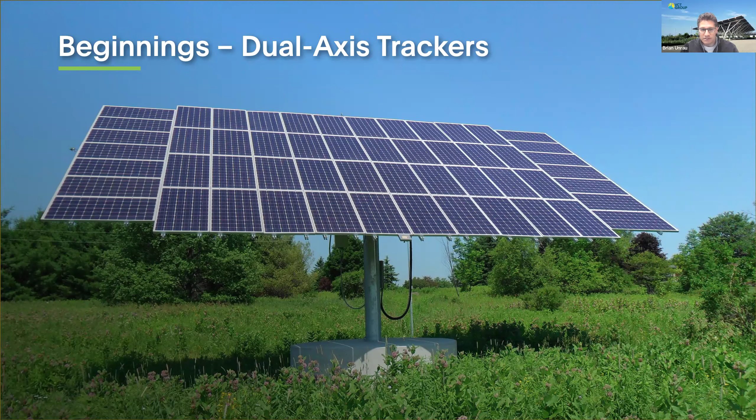So starting with our story here, when we first got into solar back in 2009, carports weren't even on our radar. We started with dual axis trackers, which are ground mounted machines with motors and gears that tilt and rotate to follow the sun across the sky. From morning to night, they chased every ray of light. We installed hundreds of them, and at the time they made a lot of sense. We liked them for their intelligence, squeezing more energy out of each panel. We thought, this is solar done smart.

However, fast forward to 2017, and we got the opportunity to work on the Evolve 1 project in Waterloo. This was Canada's first certified zero carbon building from the Canada Green Building Council. Now, even then, we were still tracker people, so naturally we tried to convince the property owner to install a field of trackers in the parking lot. He shook his head and said, no, carports. We begrudgingly agreed, and I'm grateful we were nudged, because during that project, I think I fell in love with carports.

So before we dove headlong into the carport design, we validated the opportunity. Parking lots are one of the last great underutilized canvases in our cities. In Canada alone, we have about 80 million parking spots, and a full quarter of those, roughly 120,000 acres worth of asphalt, or 20 million spots, are in the institutional, commercial, and industrial sector, which is bigger than some provinces.

And here's the kicker: per capita vehicle ownership is still climbing. Households with 3 or more cars are growing fastest. So we see parking lots as a necessary evil, but something that is going to persist into the future. They aren't going away. In fact, they're growing, which means we have to ask, will they remain heat islands of asphalt, or can they become power plants and public assets?

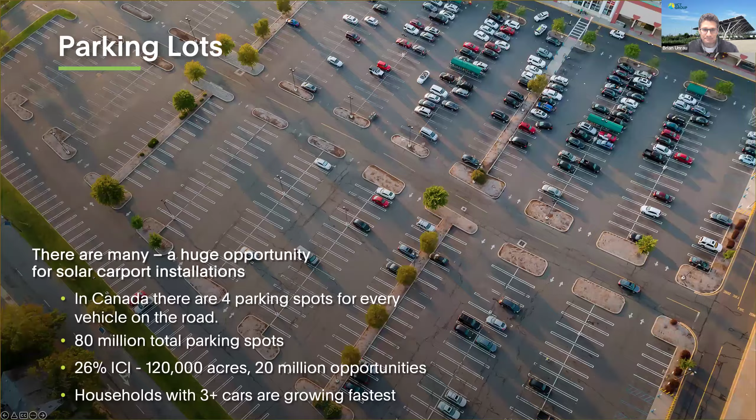So everyone I've ever taken for a stroll under a carport has had a similar reaction. Basically, they stand underneath, look up, and say, we need to do this everywhere. And I'm hoping you all start to feel the same. We think it just makes sense. It's solar you can actually stand under. It's not invisible on a rooftop, but part of our daily life. It's shade, it's shelter, it's identity, along with clean energy.

And here's the real architectural shift. Rooftop solar really just asks the technical question, how many modules can we squeeze in? Carports ask a very different one: how can structure and energy elevate the space? And that's where solar stops being equipment and becomes architecture, we believe.

The first carport we built was supplied by a company called Schletter. Halfway through, they filed for bankruptcy protection and everything froze. Some of their former staff, even unpaid at the time, helped us work directly with the aluminum extruders, and with their blessing, we managed to finish the project on time and on budget. The only thing we lost were a few sleepless nights. Unfortunately, when Schletter came back out of bankruptcy, they stopped selling carports altogether.

So there we were. We just built our first carport. We were getting compliments left and right. We saw the opportunity in front of us, and suddenly there was no product to buy. And that's when we made the decision: if we want to keep building these, we'll have to design our own. So what began as a reluctant yes became a design commitment and something that we've now been working on for about 8 years.

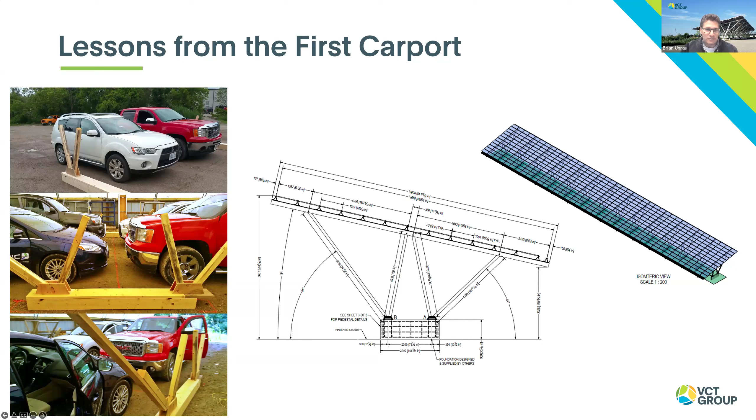And then came installation. The original design used clamps that pulled from the top, which meant our crews were tempted to climb out of the lifts to reach them. Not exactly safe. We'll just have to say that our safety officer was kept busy during that installation.

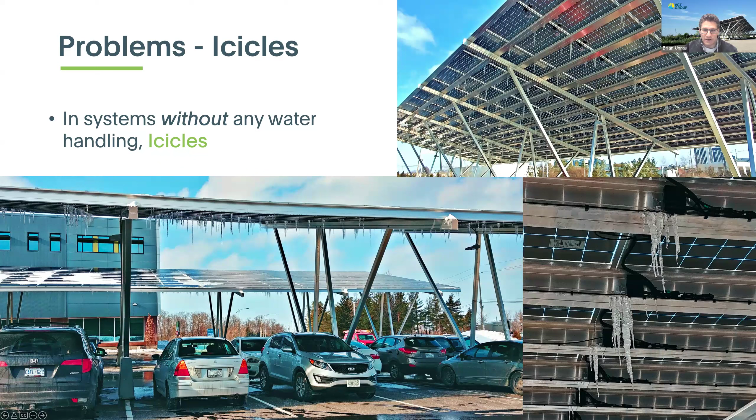And then the first winter hit. Suddenly, we had 3-foot icicles dangling throughout the entire array. One person described to us that he was ending up scraping 3 inches of ice off his windshield before he could drive away. And so that really wasn't the user experience that we were hoping for as we built these systems in the parking lot.

Snow would drop right at the edge of the stalls, and it was close enough that plows couldn't clear it properly and cars couldn't get out of their parking spots. It was a humbling reminder: getting the design right isn't just about structural integrity or panel yield, it's about how people actually use this space, and that really informed how we looked at things going forward.

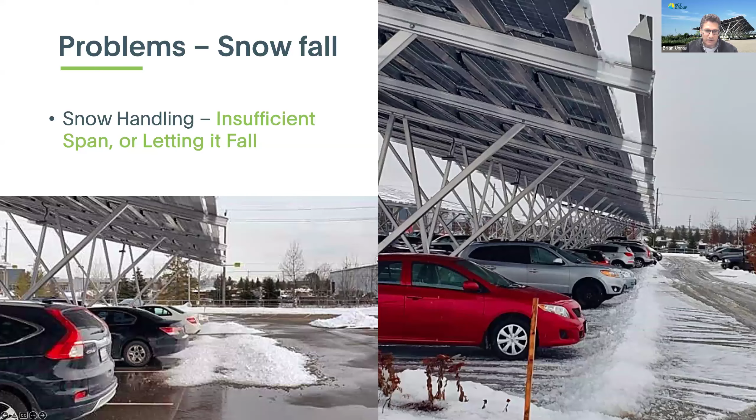Carports are exposed, they can't hide, they demand architectural consideration: there's the rhythm, the proportion, and its physical presence. And at the same time, snow loads, drainage, budgets, maintenance, it's a balance of beauty and pragmatism, and that's what makes them a fascinating design challenge.

So out of those early lessons, the door clearance issues, the safety headaches, the snow and ice disasters, we started to shape our own design priorities. And if you embark on your own design of your own carport or canopy structures, or are simply looking to the industry to see what features of a carport are important, we recommend consideration of the following.

Firstly, no vehicle obstruction. It seems obvious, but parking stalls only work if people can actually open their doors and get out safely. Second, using industry standard panels, but build in flexibility. So module sizes right now are a moving target in the industry. They're getting larger every year. So we feel that a good carport needs to adapt as panels evolve without forcing a redesign every few years.

And as a specialized product, there are what we call frameless modules available in the market that are more similar to an insulated glazing unit. We looked at these for the basis of designs, but realized that it didn't make sense for us to pay a premium. Sometimes those cost up to 5 to 10 times the cost of a regular panel. And then the first thing we want to do is put a metal frame around it. So we went back to the industry standard panel and decided that that's got to be our basis.

Third, we wanted to optimize for bifacial panels. So there's free energy bouncing off the pavement that can hit the backside of the panels, and we want to capture it. So depending on the site and the elevation of the plane of panels, we can produce an additional 10 to 15% more energy using bifacial panels, and these panels are more or less the same cost as a single-sided panel.

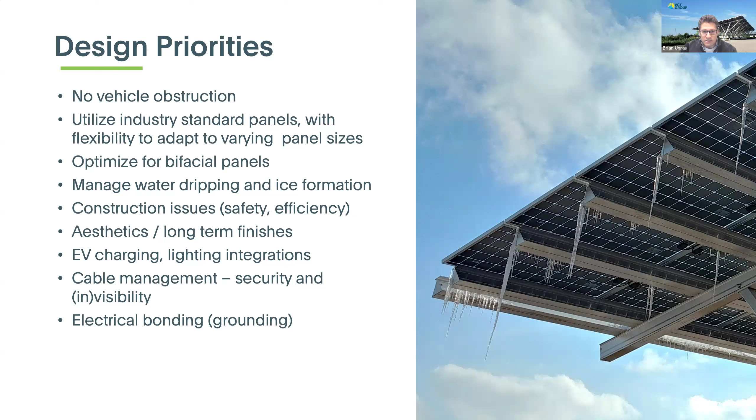So taken together, these became the core of our design checklist, our way of turning those early growing pains into a system that was not just functional, but durable, safe, and we hope worthy of being called architecture. So a little bit about some of those individually.

So one of the biggest advances in solar technology over the past few years is the rise of bifacial panels. Unlike traditional modules, bifacial panels collect sunlight not just from the front, but also the backside, capturing reflected light from the ground or snow or surrounding surfaces. And in the right conditions they can add 5, 10, or even 15% more energy production. But there's a catch: it only works if the back of the panel is actually exposed. If a beam or conduit shades the backside, you've essentially paid for a window and covered it with plywood.

So good carport design means keeping the backside clear and uncluttered. Structural members need to frame the panels and not eclipse them. And of course, cable management and electrical bonding need to be tidy and not draped around. Done right, we think bifacial optimization is about turning every square meter of the canopy into a working surface, top and bottom. It's a detail that looks small, but we think it can add years of extra energy yield over the life of the project and really improve the economics.

Another thing that we see out in the industry is that not every so-called solar carport we believe is really a solar carport. Too often what we see is just generic frames with a deck on top and then solar's really just bolted to that. Really, they just created a roof and they've done rooftop solar out in that parking lot. The panels are incidental and sometimes they're even invisible.

So we think carports are the opportunity to make solar authentic to the design. The panels aren't really an accessory, they're the roof plane of the system. The structure, the spans, the rhythm of light, all of it shaped together with solar in mind. So it's really taking it from a carport of solar, not merely a carport with solar. And that's when they stop being shelters and become symbols of value. They're really statements of climate leadership. As one person put it, it is often the first and last impression you have of a facility when you arrive or depart. And we think it leads to better architecture.

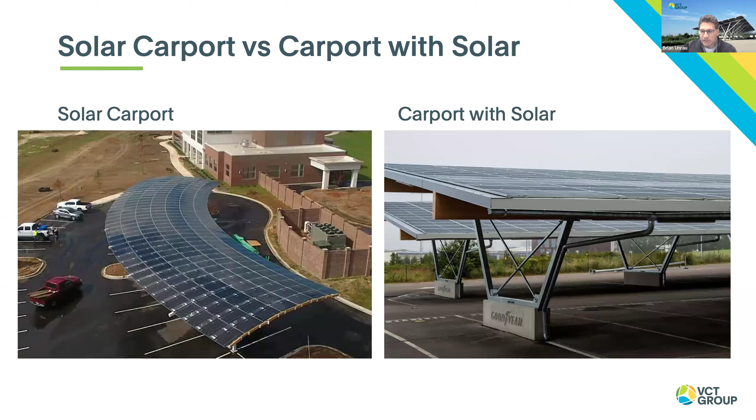Textbooks will tell you the optimal slope is about the latitude that you're located at minus about 10 or 15 degrees. So here we are in Waterloo region at the 43rd parallel. So that would put optimal tilt at about 30 degrees. But a 30-degree carport is kind of impractical. It's kind of bulky, awkward, and it almost looks like we put a ski jump in the parking lot. So we compromise. Most carports we build and what others build in the industry are somewhere around a 10-degree slope. And of course, you want to try and have that due south wherever you can.

Taking it down to 10 degrees from 30 degrees in our area here is a bit of a sacrifice, but it's only about 5% of the energy generation by taking it down those 20 degrees. And if we take it off of due south and start turning it either east or west at a 45-degree angle off of due south, you want about a 5 to 10 degree slope on things, and we're only losing about 2% more power. So it isn't so critical that everything has to be exactly true south when you're looking at orienting things in a parking lot.

And then if you even get so far as facing due east or due west, then actually 3 to 5 degrees is optimal, and you're losing another 4 or 5% production. But sometimes it's just necessary to work with the drive aisles. And then the good news is that the bifacial gains that I was mentioning can help claw back most of what you lose from not chasing textbook perfection. So the sweet spot is really just balancing that energy yield, the structure, the aesthetics, and how you're going to work with the snow.

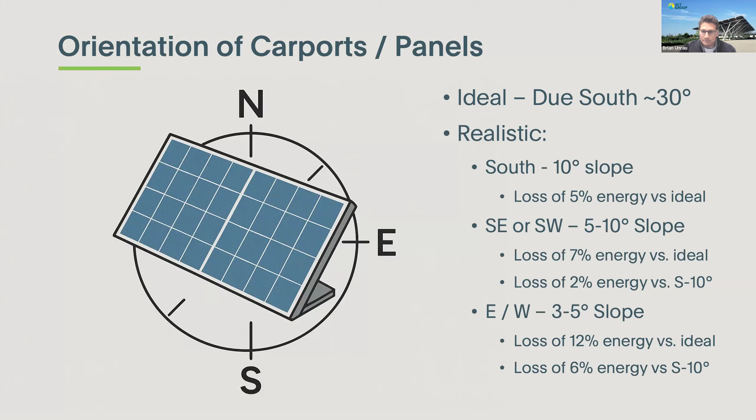Solar panels are long-term assets. They have no moving parts within them, and most of them carry a 30 to 40-year production warranty. But the warranties assume proper care. The panels rarely fail because the silicon wears out. What often happens is that they fail because of micro cracks, and that is caused by stress or torsion or point loading on the panels.

And ironically, the most common cause is not the weather, but in fact, the people that install and service the system. So stepping or kneeling on panels during that install or service is really what's going to cause a lot of the damage to a system. So we think that part of carport design is protecting panels not just from nature, but from ourselves. And that's how we believe we get long-term value.

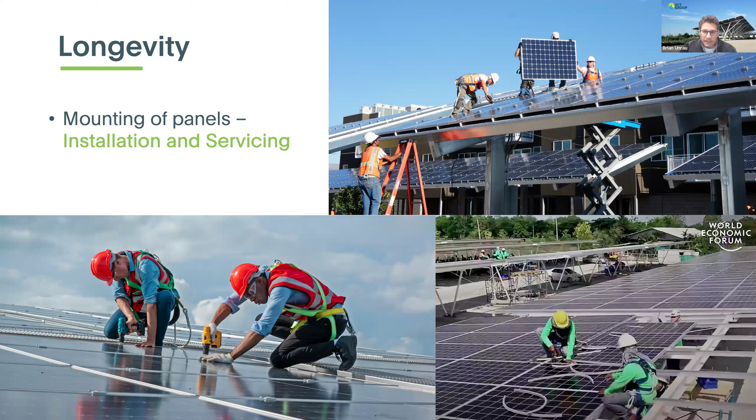So here's a little video produced by the National Renewable Energy Laboratory that shows what happens to a panel, or pardon me, a cell inside a panel.

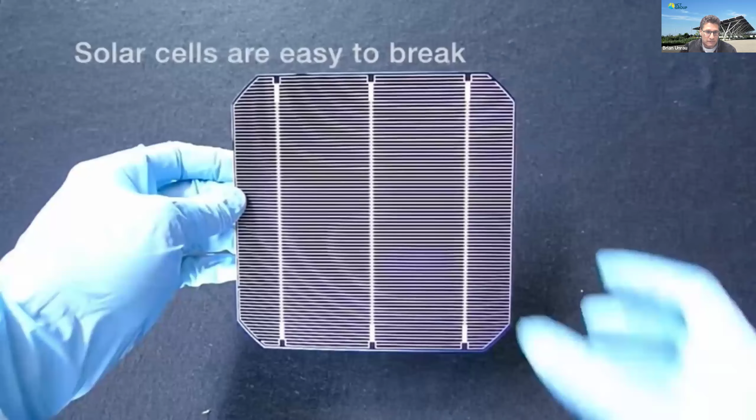Hopefully the streaming of this works effectively. We can send a link out to watch it through YouTube at another point. It's not really working. I can see it on my screen, obviously, but I don't really know how that translates out there.

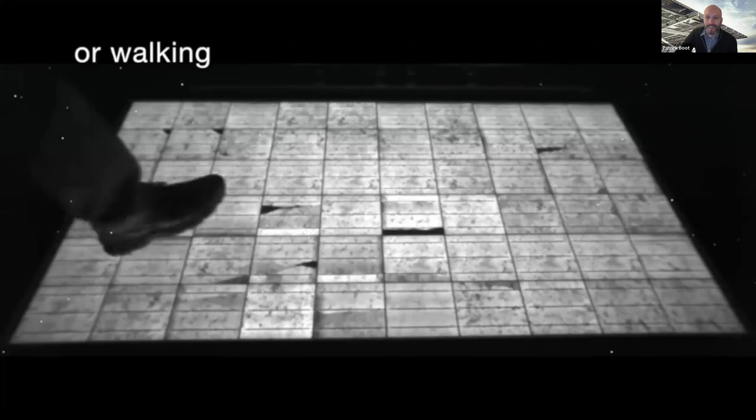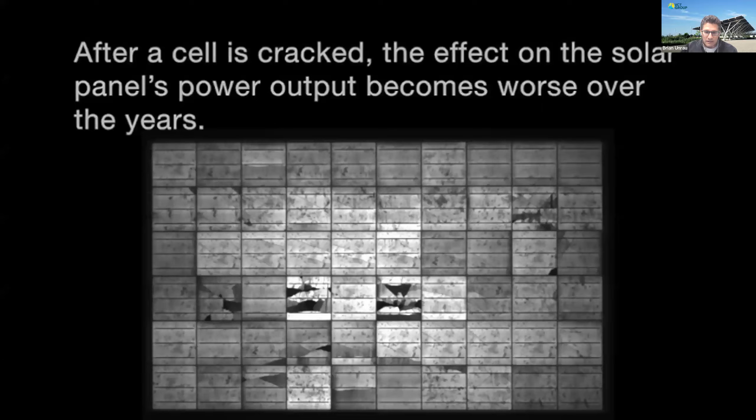Okay, so effectively what's on the screen is electroluminescence. So as much as we mostly shine light on a panel and then get electricity out of it, you can actually operate a panel in reverse, apply current to it, and it becomes a bit of an emitter of infrared light. And so when you do that in a darkened room, there isn't any sound to the video, it is just a silent video, but you can actually see through that light production what parts of the panel are still active, and anything that's darkened is a part that's now broken away from the electrical system and is not able to continue to produce power into the system.

So as we saw, inside each panel, there are cells, and those cells are wired in strings. So the ones we use today, there's typically 3 or 6 strings within a specific panel, and within each string, the cells are connected in series. And if you remember your grade 10 science or physics, series means the weakest link rule. So if one cell underperforms, the entire string is dragged down to that level. It's just like the old Christmas lights. If one bulb went out, the whole string went dark, and that's the same idea here.

So for a panel with 3 strings, shading or the breakage of a single cell can drop the panel's output by 1/3, down to about 67%. And if an entire row of cells is shaded or fractured, but they're all in the same string, it doesn't change the impact. It's still the same, you lose 1/3. Now take that breakage or that shading, if it's across a set of cells that have all the strings within it, the whole panel can actually go to 0. And so that's why shading or cell damage is really the enemy of solar.

And that's why design decisions, how trees or light standards are placed around the canopies and how you place the canopies in relation to the surrounding buildings, is really quite important. There are bypass diodes that are built into panels to reduce the impact, so one bad panel doesn't cripple an entire string, but even then, some performance loss carries through the string, and that's typically anywhere from 10 to 20 panels in that string that are now producing less. So our takeaway here is that in solar design, little things can have really magnified effects on the overall performance of the system, so we need to pay attention to these details.

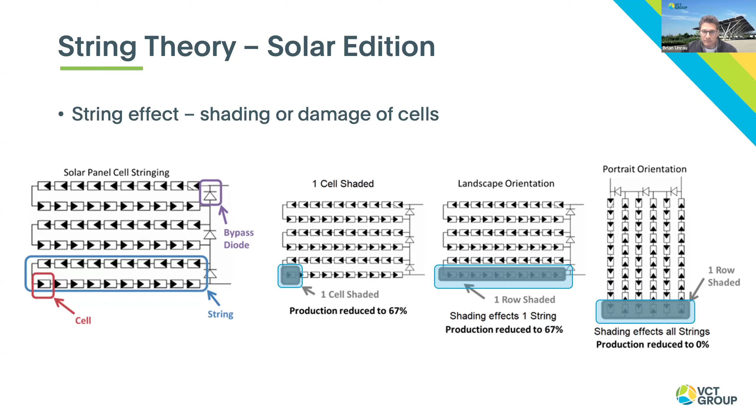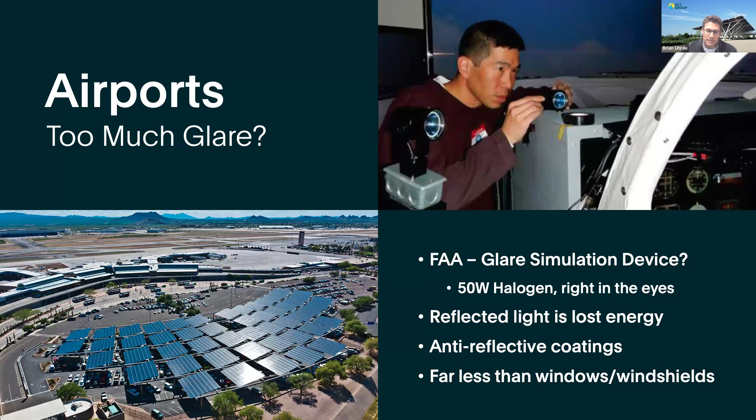And so when it generates power, you use the power and energy on site first. And if you're producing more than you need in any given moment, that excess then flows out to the grid, and it effectively spins your meter backwards. And then for every kilowatt hour you export, you get a credit on your utility bill. Later, when you need more power than your system is producing, say in the evening or cloudy days, you pull that electricity back from the grid and the credits are applied.

At the end of the billing cycle, you're only charged for your net usage. That's where the net of the net metering term comes from. So you pay for your net usage, and any credit surplus can be carried forward and used up in future months. So in practice, your parking lot canopy becomes both a generator and a buffer. When the sun is out, you're making clean energy. When it isn't, you're drawing from the grid. But on a credit system, it smooths that out over time.

So for clients, this means predictability. They're not just offsetting power in vague environmental senses. They're really literally reducing their bills. And as we mentioned, reading and interpreting electrical bills is really a dark art in Ontario. They are some of the most confusing documents I think a person could ever try to interpret. So if you're ever looking at electrical information and want some help, by all means, reach out to us, and we're happy to provide some guidance on this.

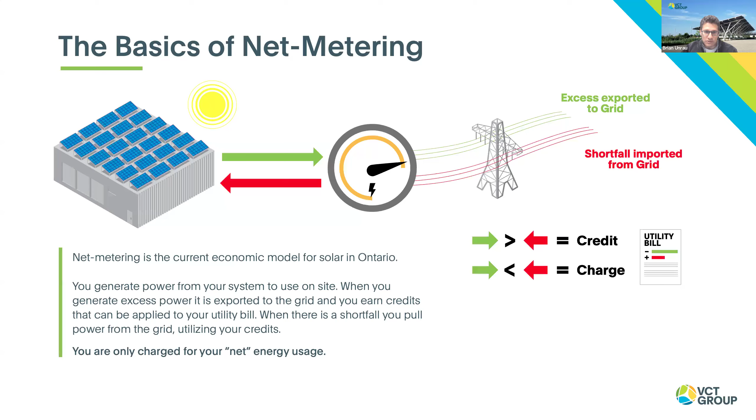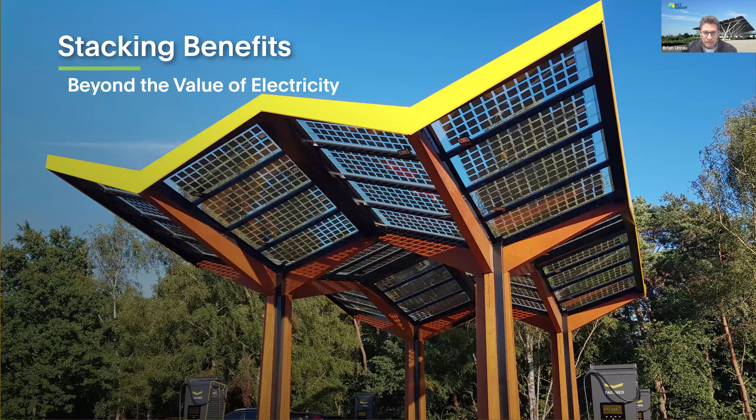And the carports don't just pay back through electricity and carbon offsets. They really change the economics on a site in ways that go far beyond the meter. So they can reduce ongoing operating costs, they can lower maintenance, they can extend the lifespan of existing infrastructure, and even create new revenue streams. In some cases, these side benefits are just as compelling as the energy itself, and sometimes even more so. What makes solar carports exciting is to stack all these values together in a single piece of infrastructure. So instead of selling one story, this saves energy, you're offering 5 or 6 different stories of financial and functional return.

One of the biggest hidden costs for property owners over the next decade will be EV charging infrastructure. And done poorly, it means tearing up parking lots and trenching new conduit and redoing civil work every time demand grows. But done well, it means planning ahead. And with a solar carport, much of the infrastructure is already in place. The conduits, the switchgear, the layout. EV chargers can typically be added incrementally as demand increases without ever touching the pavement again. And that alone can cut future installation costs nearly in half.

Then there's snow clearing. Anyone who has run a large parking lot knows it's an ongoing headache. By covering major sections with carports, you reduce the acreage that has to be plowed. You also make it possible to clear snow more efficiently, even during the day when vehicles are parked. So instead of waiting until night or shutting down sections of the lot, you can facilitate a cleaner parking lot throughout the day. And let's not forget water.

A flat lot sheds water in unpredictable ways, but a carport roof gives you a defined plane, which means you can capture water at the source, clean, concentrated, and ready to use. So that can feed irrigation or go into cisterns, and then be used for gray water flushing systems. So it's not just cost savings, it's resource efficiency along with it.

On the topic of maintenance and safety, one of the biggest recurring costs in Canada is parking lot salt. Tons and tons of it is spread every winter, but salt is corrosive. It eats into concrete, into the asphalt, into the curbs, and even into the cars themselves. And so with solar canopies, managing water and snow properly, the need for salt is drastically reduced.

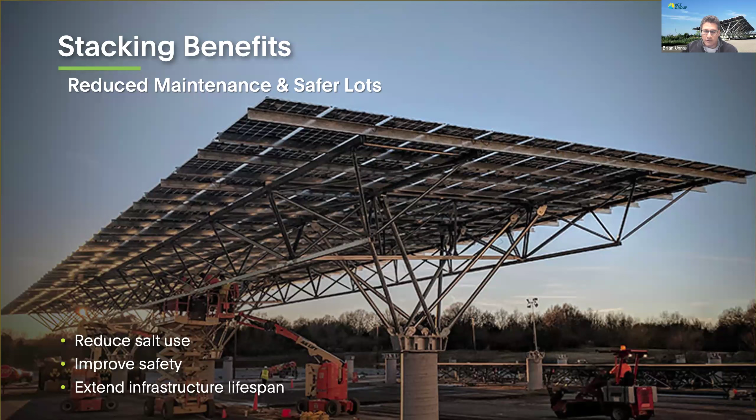Parking lots are expensive to build and maintain. Plows scrape surfaces. UV accelerates chemical breakdown and degrades asphalt binders. And of course, those freeze-thaw cycles widen those cracks once that begins to happen. And carports reduce nearly all of these: less plow area, less salt, fewer freeze-thaw cycles, and shade that protects those binders.

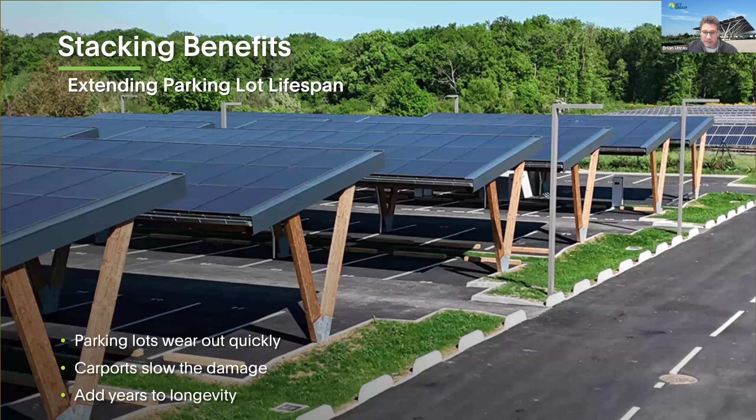You can generally extend the lifespan of a parking lot by an additional 10 or 15 years. And again, for owners, that's millions in avoided costs. And for architects, it's designing infrastructure that preserves itself.

And shade is more than just being about comfort. It is also about protection. So if you're thinking about your own car at this time of year, the searing heat, the fading upholstery, the sticky film that builds up on the inside of your windshield. I know I need to clean mine right now. That film is literally your dashboard and your interior plastics off-gassing. And it's the slow destruction of value.

So now multiply that across a fleet of vehicles for a company, a dealership, or even a municipal fleet. Keeping vehicles shaded under carports slows UV degradation, it protects their finishes, and it extends their usable life. And that translates directly into higher resale values and lower replacement costs.

And in some regions, it's not just sun, but hail. In hail-prone areas, many dealerships can't even get insurance for their lots anymore. Solar panels, on the other hand, are made of heat-tempered glass, typically rated to withstand a 25 millimeter hailstone at terminal velocity, which is about 83 kilometers an hour. And some are even rated to handle 35 millimeter hailstones.

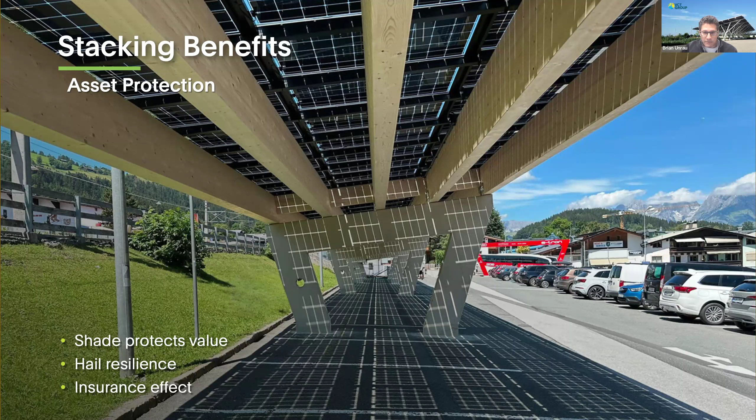And panels survive hail far better than vehicles. If one does ever break, the cost of replacing a panel is a couple hundred dollars, much less than the cost of replacing that vehicle. So when you look at it that way, the canopy is not just a generator, it's also an insurance policy.

And so one of the clearest signals that this is more than a niche idea, that it is really something that's growing, is the policy momentum behind it. In France, parking lots with more than 80 spaces must add solar. If you have more than 400 stalls, it's by July 1st of 2026, which is less than a year away. And if you're between 80 and 400 stalls, then by 2028 you need to have canopies in place. And then there's payments that you have to make if you aren't meeting those goals.

California recently had Bill 49, which opens highways and rights of way for additional solar and solar canopies. Rhode Island has lots over 16,000 square feet must cover half with canopies, and 5% of stalls must have EV charging. And Maryland has a canopy dual use grant of up to 60 cents per watt, which is about 25% of the system cost.

And so the messaging is clear. Governments see carports as climate infrastructure, and they're making them mandatory, or if not mandatory, then hopefully irresistible from a cost and payback standpoint. So we believe that the question for us in Canada is not if this comes, it's more a question of when it's going to come.

Okay, I'm going to dive into the maybe hidden aspects and the codes that shape them, and all the coordination that needs to happen between architects, engineers, designers, construction teams, that kind of thing. So I'll delve into the practical realities of structural loads and appropriate material choices and zoning and all those kinds of things.

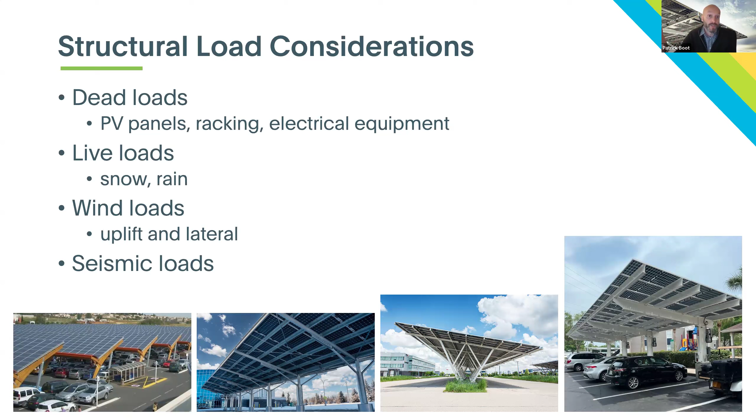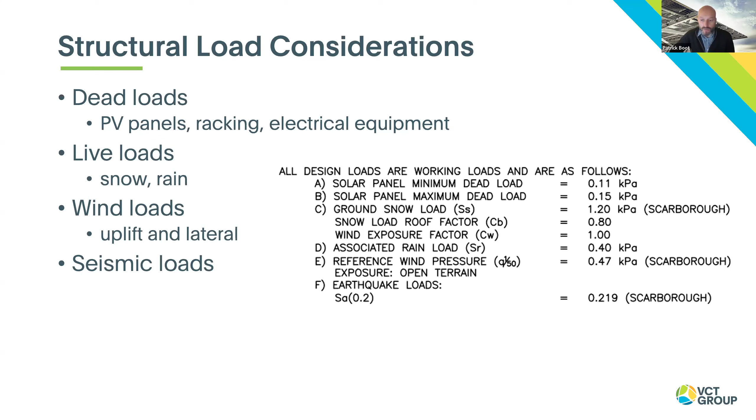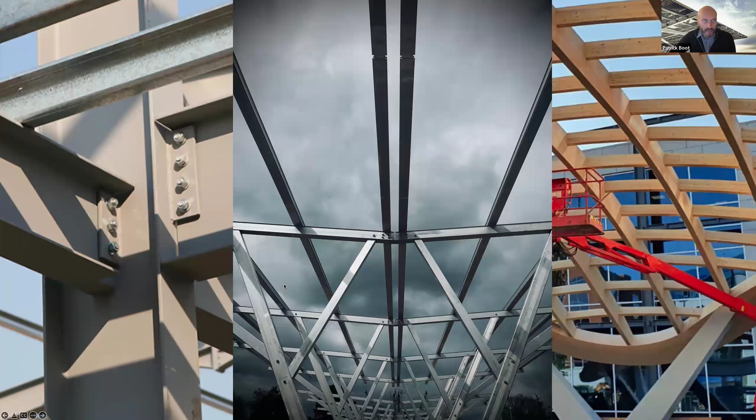So working within those, not constraints, but those realities, it kind of leads you to three structural building materials. You've got structural metals like steel or aluminum, or a structural timber or mass timber like a glulam, that kind of thing. All of these can be used to create unique, functional, aesthetically pleasing solar canopies that work within and can sort of wrestle with those forces I talked about on the previous slide.

So expanding a little bit more on each of those materials, if you're talking about steel, many of you may be material scientists to different levels of expertise, but some of the highlights in terms of pros and cons. Steel has high strength and durability for load bearing. So therefore, it's capable of spanning larger distances between supports, potentially having a lower impact on parking area, although I'll talk about the municipal guidelines that govern setbacks in a little bit. With steel, there's typically lower initial cost for the material, high stability in terms of deformation resistance, and you're often working with industry standard dimensioned beams.

The cons on the other side, challenges with using steel: it's very energy intensive to produce. You have some added fabrication costs, maybe some specialized labor in terms of welding on site and those kinds of things, and then added maintenance costs to prevent corrosion.

When it comes to aluminum, obviously, pros are it has a high strength to weight ratio, much better corrosion resistance, and an ease of fabrication, or an ability to manipulate complex profiles. Largely, you're extruding large profiles, but the design of the intricacies of those are set in the die, and then you're not stuck with C-channel or I-beams or those typical profiles of steel.

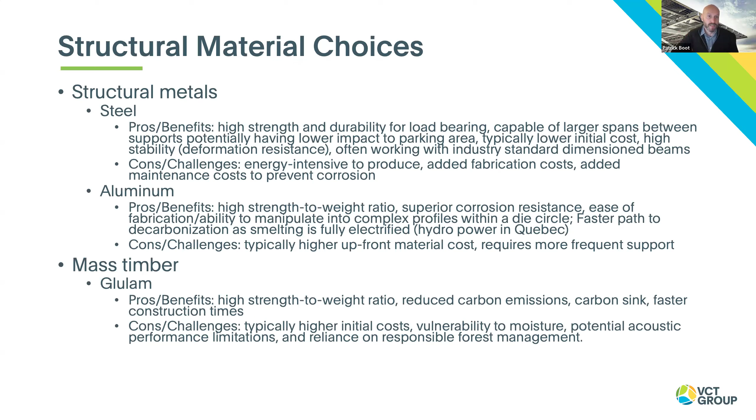And then for mass timber, maybe a conclusion is that cantilever members of mass timber get really big really quickly to handle the forces and the loads. So they're really best in post and beam construction, four supported corners, that kind of thing. If I'm thinking sequentially, you want to think of the structural loads that are acting in that specific geography, in that specific location, with adjacent buildings and that kind of thing.

The next thing you might want to think about is the fact that, as Brian said, with net metering, all of these systems are grid connected, and so there are some considerations. All of these solar systems in Ontario, whether canopies or rooftop, are largely connected to the building's electrical panel, unless you have an off-grid situation with a battery backup. But even then, there's coordination and intentionality that needs to happen with the building's electrical panel and ultimately the grid. Brian talked a lot about net metering. I won't get into it, but it is governed by that Ontario regulation.

What's important to think about is that the grid has capacity restrictions and requirements. Some areas of the grid are quite taxed already, some have plenty of capacity, and all of these are what are called DERs, distributed energy resources. They're capable of sending all or portions of that energy back to the grid. And so the grid needs to know where the sources are that are pumping energy into it, as much as it knows how much energy is flowing around in that grid.

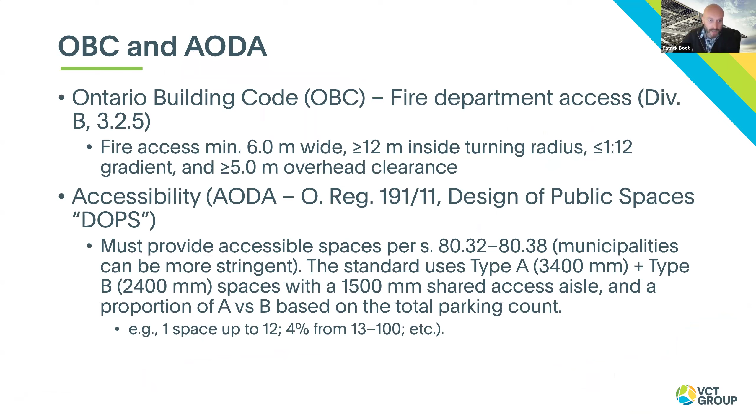I've already done that. That is this slide. I forgot that I had added that. So

So then different kind of typologies or form factors are designed for specific applications within the context of structural loads, how much the grid can sort of support in that area. But you might look to integrate sort of single row coverage cantilever designs, or larger monoslope designs that would sort of cover 2 rows of parking, nose to nose parking, or double loaded as we would call it. So many of these are sort of double loaded form factors.

A dual slope with a central trough is if you're thinking about water management and funneling something to a central gutter or something like that. A dual slope or a central ridge sheds that water to the edges of the array. So we're implementing a dual slope central ridge over a sort of picnic area at the equivalent of an amusement park or something. So different applications, different form factors for different use cases, different generation targets, coverage areas.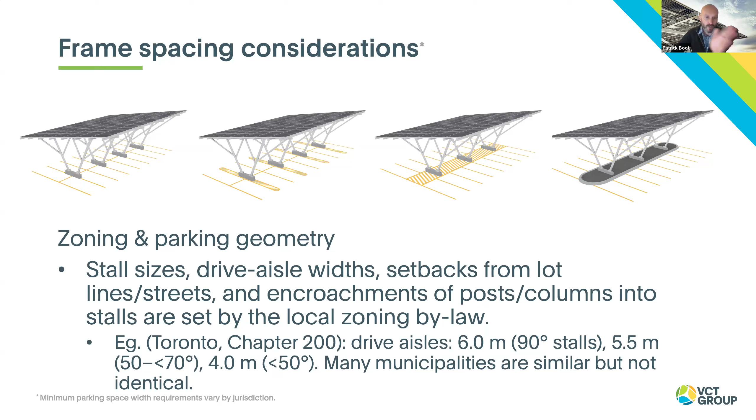here's an example of Toronto. So drive aisles need to be 6 meters if you have 90-degree stalls, but if you have angled stalls and you're entering from an angle, then there's some differences. Again, municipality by municipality, it's important to cross your T's and dot your I's when doing carport design to make sure you're checking those boxes. I'll get into more details about the 4 different visuals after a bit of a case study here.

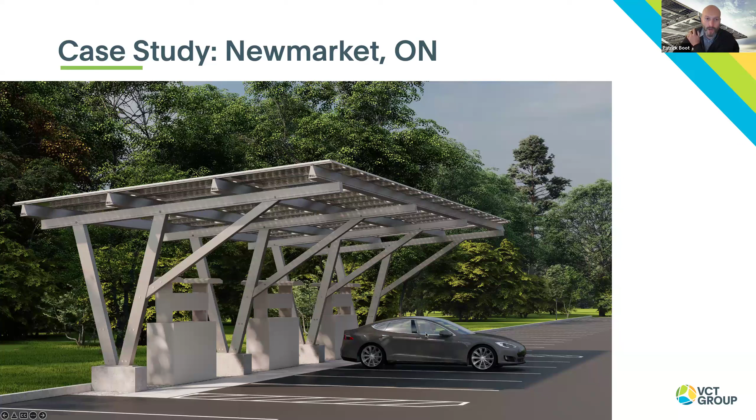So we did a project, it's not commissioned yet, but completed construction of a single row coverage cantilevered canopy like this. This is a mock-up of it, but this is in Newmarket, Ontario. So we moved forward with the typical architectural and engineering coordination that needs to happen. So we're working with minimum heights and those clearances and everything. The foundations look like an embedded pad and then a pier that sticks up. This would be our typical foundation for a structure like this.

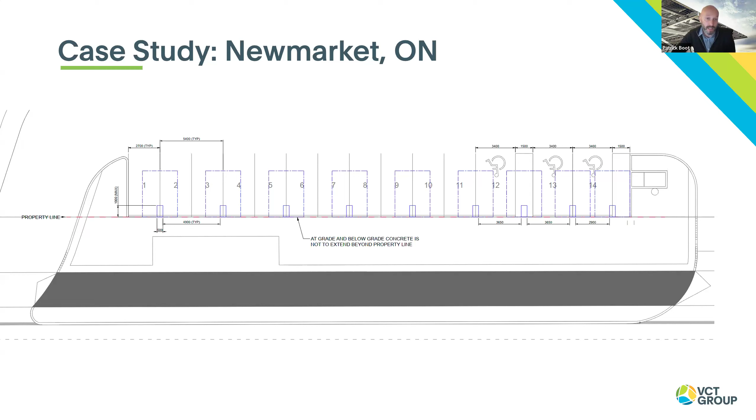The challenge that we ran into was that there was a property line running east to west across this image, and we couldn't cross that property line underground or at grade. So that foundation that had a large pad with the pier centered within it needed significant rework to work within the local municipal guidelines and where that property line sat.

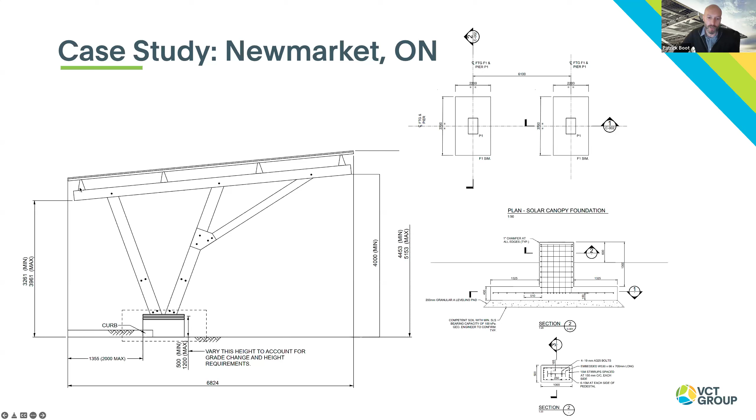They allowed us to allow the back edge, I'll go back to this slide, the back edge of the canopy to extend over that property line, but nothing at grade or below grade could be extended past it. So pretty proud that we were able to come up with a solution there.

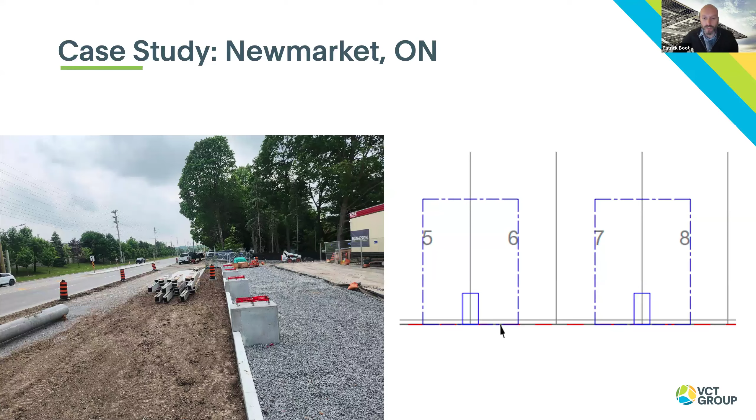But this is just one example of the kinds of localized challenges that any carport designer, installer, construction team, or architect is going to need to consider, as they change from position to position or from geography to geography. So then back to those 4 examples of how you can think about integrating the foundations and the frames within parking lots specifically.

So there's this standard layout where you're spacing foundations on parking lot lines or with existing parking spot spacing. In our experience, again, with aluminum, you're not really spanning more than 2 spots, so about 5.4 meters max from side to side. There's a little bit of variability, depending on municipality. Some parking spots are a little bit tighter, but in a standard approach to how we space frames, this would be the way.

Either way, you're likely losing a percentage of parking, because depending on the municipality, where they start measuring that parking spot is probably on the inside edge of these foundations, so you're not actually able to count that distance right to the painted line, because technically the foundation is obstructing a bit of that parking spot. And again, municipality to municipality, there are different rules about that.

If you want almost a bollard style, or a clear delineation between the space taken up by the frames and foundations and the spots themselves, then what we would call a spread approach with different painted lines is maybe a better way to go if the site can accommodate. If there's space to extend the drive aisles, this really pushes those parking spots clear of the foundations, but it would need more space for drive aisles between the lanes.

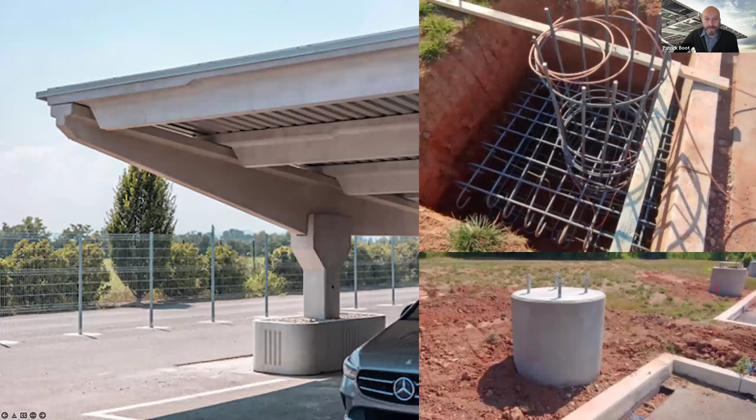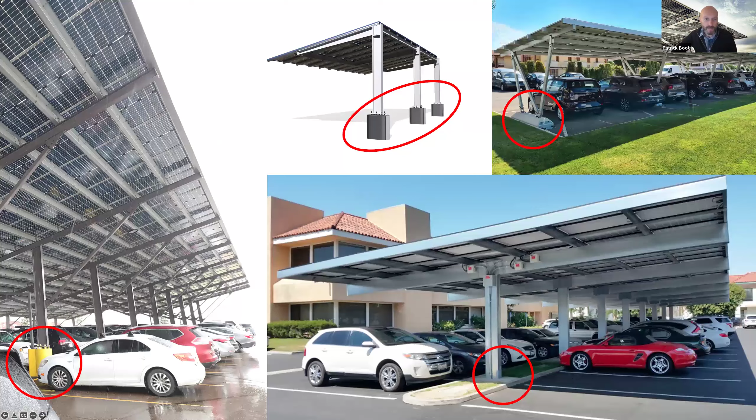Those images are all showing large rectangular precast foundations. That's what we tend to do, but there are different approaches and treatment types: pour in place, caisson, either raised or submerged relative to grade. Some choose to make the foundations more of a feature by adding a skirt, like the image on the left. These are more examples of options for resolving, elegantly or not depending on how you feel, that connection point between the structure itself and the ground, calling back to the examples I was giving.

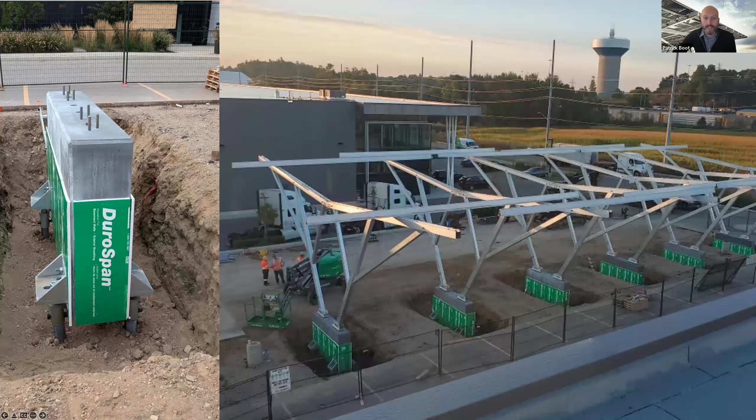This is the most recent picture, taken yesterday on a site in Cambridge for a carport that we designed and are in the process of constructing. We use precast concrete foundations, which allows us to integrate electrical conduit at the point of manufacturing. We can cap them if we don't use them, but it's handy to have those integrated into the concrete from the get-go to facilitate cable routing and eliminate concrete curing time on site. Different approaches have different advantages and drawbacks.

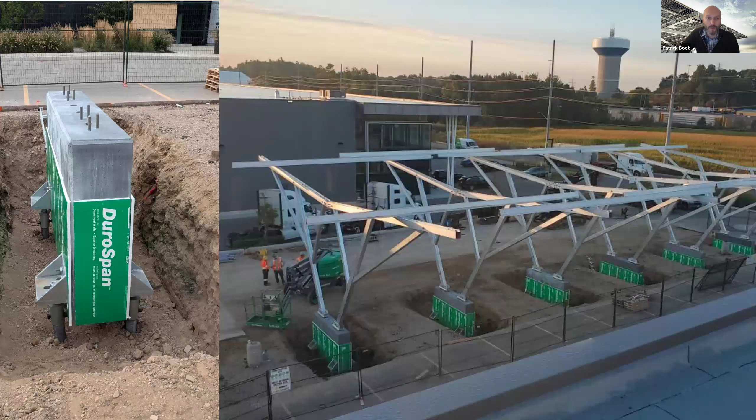But this one is quite live. I think we have a crew there right now working on it. This is one array of 3 in a long 13-foundation canopy in Cambridge. A couple more slides here, and then we'll wrap up and get to questions.

So other Ontario Building Code and local bylaw considerations to think of. We could do multiple sessions on this, and we're really just skimming, but some other things feel relevant at this stage. Site plan control, as governed by the Planning Act: some carport projects that add structures over parking lots will trigger full site plan approval.

So you have to coordinate with grading and drainage and civil sewer, that kind of thing, landscaping, traffic circulation, all of these kinds of aspects, depending on how they're deemed. So I put in quotations here, sometimes these are called parking structures or buildings or accessory buildings or ground mount solar, and they all have implications for occupancy and fire separation and suppression or sprinklering, that kind of thing.

So we prefer that they are, and we've sort of charted a course that they are deemed a building. It does mean that a building permit is required when building these. So that means that you need structural drawings sealed by a professional engineer, and then again, each municipality will sort of reference the building code for enacting or for building these structures.

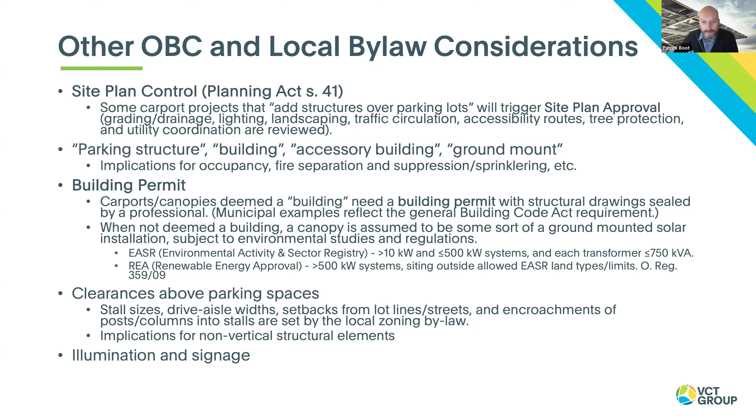And maybe lastly, as Brian said, these are power plants. There's a lot of live electronics, electrical equipment that are part of these. So ESA permit and working with the Ontario Electrical Safety Code are important aspects of this work. You have this kind of DC cable management.

So on the DC power production side, every PV panel is connected to each other in strings, as Brian talked about. Multiple strings have capped voltages and they feed into an inverter. There's bonding and grounding required. These are metal structures, so you definitely want to be intentional about that. And then after the inverter, converting that power from DC to AC, the inverters have to be mounted within 1 meter of the array, so nested up quite close to the array.

Otherwise, some technology called rapid shutdown protection is required to be installed, and we've done that on some, but really like to avoid it. I would imagine that other carport providers would say the same. The inverter is then connected to a combiner, junction boxes and disconnects, and all of this. Really, the point of highlighting these at such a high level, communications cables, lighting power cables, EV charging integration, is that there's no walls or floors or ceilings to neatly and discreetly hide all of this.

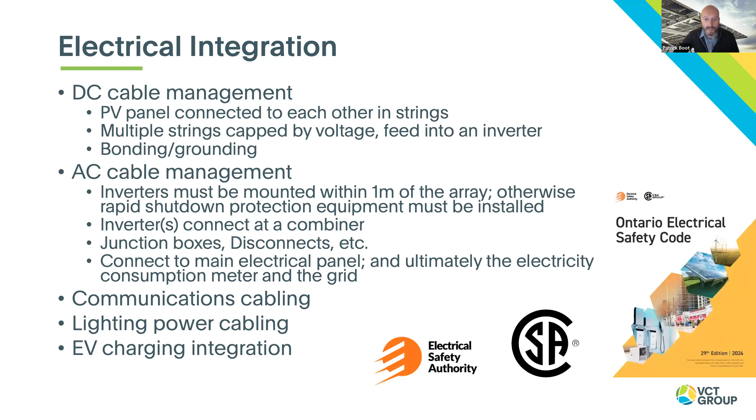So how and to what extent these are considered in the design can either allow people to focus on the aesthetics and the architectural wow of the solar canopy itself, or they really detract from the impact that these structures can have when they are executed with more intention and a systems approach.

So that really wraps things up. But key takeaways, if you were to remember 5 things from what we've shared today: solar carports are more than power plants. They shape space, they provide comfort, and they contribute to design expression of otherwise underutilized flat, necessary evil surfaces. Number 2, think local. Sun angle, snow, ice, corrosion, and codes require really context-specific solutions, not even just in Ontario, but in specific geographies within Ontario.

Thirdly, typologies and form factors matter. Cantilever, mono and dual slope, modular, foundation choice. Each of these have distinct implications for site planning, for generation potential, therefore for ROI and payback, for user experience. All of these aspects change significantly whether you go from a monoslope to an east-west dual slope. Early coordination is critical, which is why we're so thrilled to have been invited to a conversation like this.

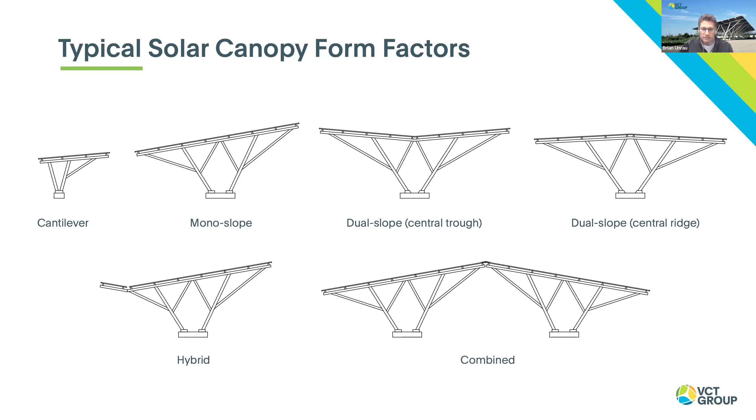There are several grants that are available. Well, one of them is federal. There's the investment tax credit for tax-paying corporations that can take 30% off of the total cost of a system. And the whole carport, including its foundations, does qualify for that. Provincially, if you go with a modification of that net meter model to say that I'm never going to let surplus energy go up to the grid, they call that load displacement. There's a provincial Save on Energy program that can cover half the cost of a system up to 86 cents a watt. So in the carport context, it's probably more like a quarter of the cost of a carport. Those will certainly help, and you can bring it probably into the low double digits, maybe 12 or 13 years, out of those alone with the energy value.

But it's really those stacking benefits. So if there's snow clearing savings, if there's EV charging infrastructure savings that you can attribute to it, if you're in a place that you have the ability to charge for that improved parking amenity, those kinds of things are what can really bring that payback down and make it financially lucrative, into that 6, 5, 4-year payback potentially as well.

And do you see these carports applied in residential, like for a single family home or in a smaller scale? Is this something you've worked with, or is it primarily commercial? For us, primarily commercial. I mean, from a structural perspective, there's nothing stopping it. From an economics perspective, as Brian was saying, the economies of scale aren't really there.

However, our sort of approach to that, I guess, is to say, if a homeowner were to build, let's say, a pergola or like a timber cover, we can modify our racking to transition from whatever material they build that small structure, and then just get the watertight kind of canopy on top. It's kind of this mixture between a carport or a gazebo, some kind of canopy structure, because then you're shedding a lot of the material of the structural elements, and you're getting the kind of solar and water handling value, and so we've seen some uptake of that in pockets.